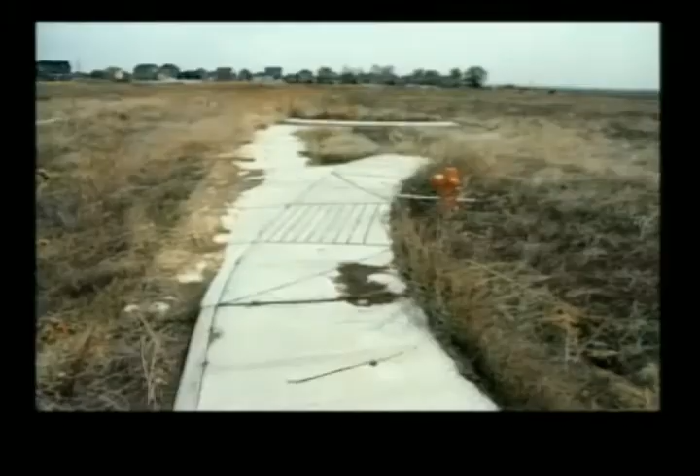This is an example of a community, this one in Colorado, where they've laid all the sewers and pipes, everything's in place, but there will never be one home ever built there. In the small town I recently moved away from, High Springs, Florida, we have 2 such developments, and I can guarantee you there will never be a home. Those years are gone. What we will build will look very different, of course, and the good news is we're returning to the past.

This is a town where I lived for 16 years. This was the conduit to get people who worked downtown in the capital of Tallahassee home to their suburbs. That road will shrink. It will go down to 4 lanes with a boulevard, with bike lanes. That's a guarantee.

One good reason for doing that is we can no longer afford to separate Florida State University from its community. Every year, one student has died there trying to get across this street. And for what purpose? To build in a place that wasn't built at the right scale, the right density, or the right anything, and now we're recognizing that. But think about the cost it's going to take to rebuild a street like this into one of beauty, charm and dignity.

It truly is going to call for new street design guidelines. That's one reason I'm very excited to be working with Ryan Snyder, is that he's pulling together the best experts in the nation to write the new bibles to give authenticity and correctness to what your engineering teams and planning teams are going to need to do.

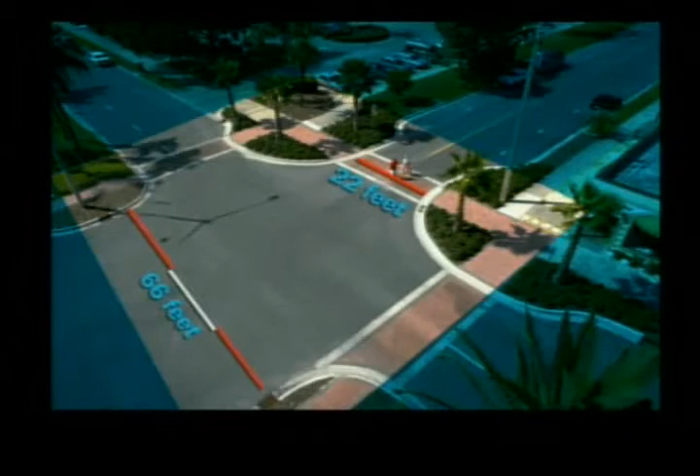There are sidewalks on both sections, but to truly make crossing the street work, adding additional tools, what I call inset parking and curb extensions, is truly the magic that starts to add that aesthetic and quality. That's what you've done. Now, how big is this, and what is the implication for Lancaster to get the downtown and many places healed? This is West Palm Beach.

I helped with a charrette in 1994, and I'm going to show you what this scene looks like four years later. One developer alone brought in $1.3 billion. This has become a hot spot.

Now, when we go back, in that era, virtually everyone had fled the downtown. There were still some people there, but they weren't the people you wanted to bump into, especially at night. In fact, when we were doing the charrette, two of our cars were broken into. When they hired their first transportation planner, brought him down from Canada, Ian Lockwood, Ian had somebody run across the yard where he was staying, chasing somebody else with a gun. That's where it was, and this is where they were three years later.

Once you have the vision, and once people are willing to work together, we end up with a totally different condition.

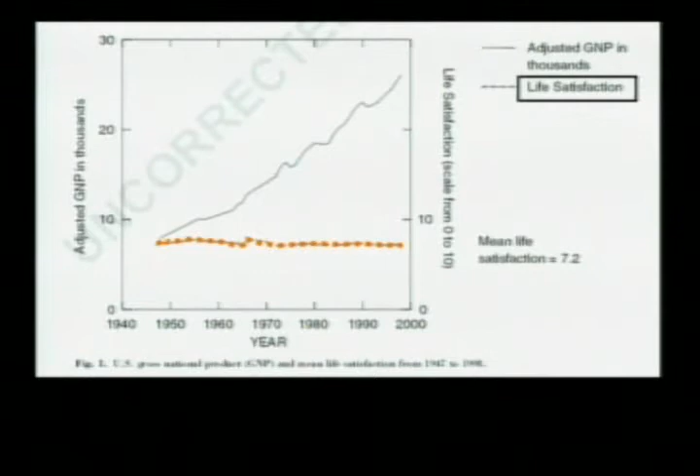There was a blip of happiness. Does everybody see when it occurred? It was in the 60s. Now, I don't know why, but we think it's the Beatles.

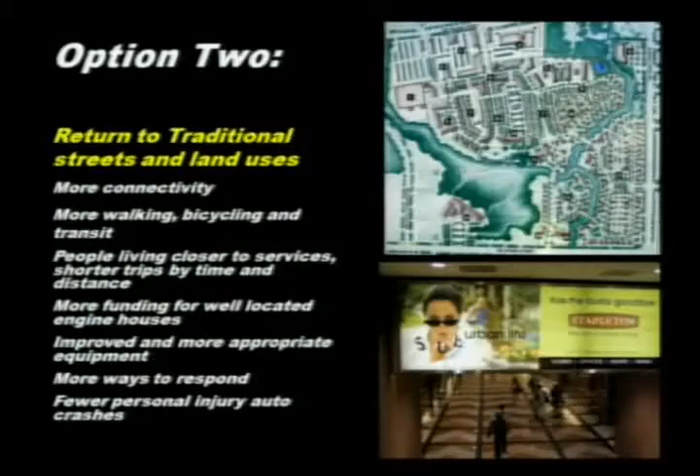Our other choice, and that's what I'm here to talk to you about this morning, is how do we get back to building traditional communities where we don't grow our traffic, we grow our people. I'm going to explain it in pure, raw form at first. Throughout my presentation, I want to make the assumption that all I'm doing is validating—I'm not presenting anything new, but proving to you that this data does exist and that we've got to do these things.

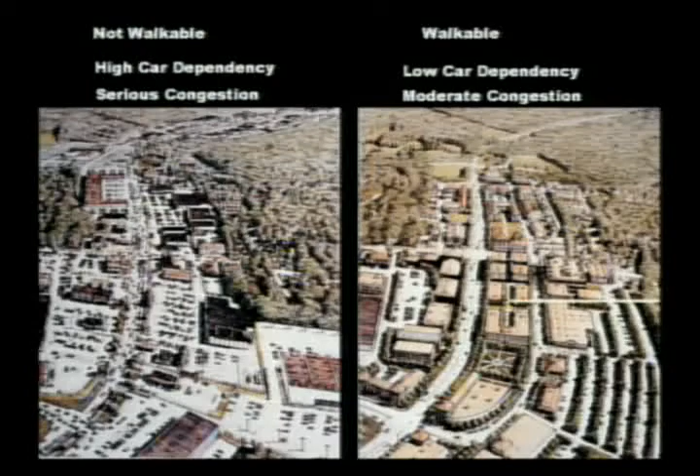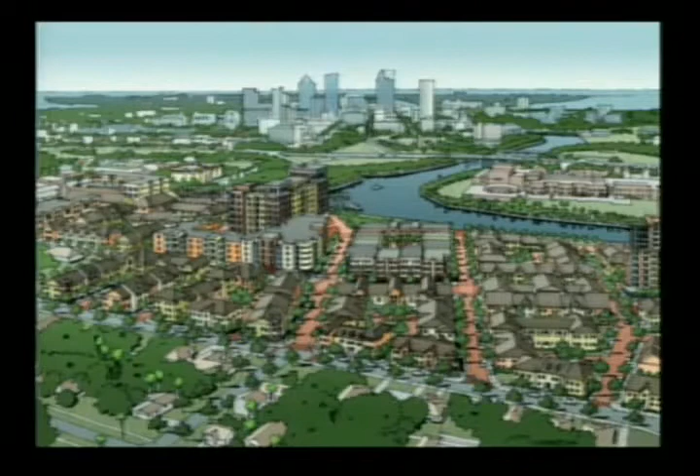So how do we convert this area of Tampa to a walkable place? Look at the open land, what's accessible right next to downtown. It seems like every town has these opportunities. When we laid this out, we said we have to connect everybody to the water, or whatever the open space is—it may not be water, it might be something else in your case, but we have to give them a view. Notice that by preserving the waterfront or open land for the public, with trails there, and connecting the streets back, all these existing homes have a much higher value. Everything you plan, every street you build, had better add value to everyone's property, not just on that street, but on all streets.

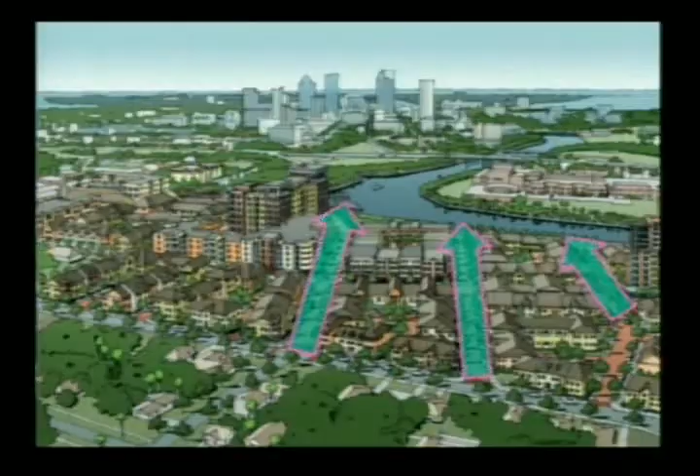90% of the work being done today is not doing this, and that's got to stop. We've got to only build things that pencil out for the greater good of all people. Now, if we want less of this, it's so simple—we build for this instead. By the way, to build for people costs about one-tenth of what it costs to build for the car. You don't have to park a bicycle in a big lot. You don't have to park people's shoes—keep them with them.

So right now, though, we're stuck in a rut. All of the predictive models, the way we measure our success, levels of service, only gives one thing. What I'm saying is we need a new beaker—a measurement that says if we're going to measure our success, we've got to measure how many children we see walking, how long people linger, how many bikes go by, all these things.

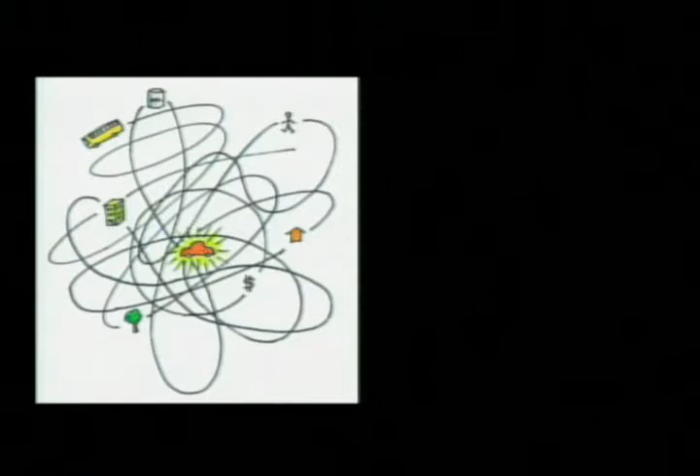But I'm going to pitch out something just as insane as what the Galileos and Copernicuses of their time were saying. Is this true? Am I correct about this? Everything—the economy, our access, our mobility—everything centers around our automobiles? That's what we built. What if it's not true?

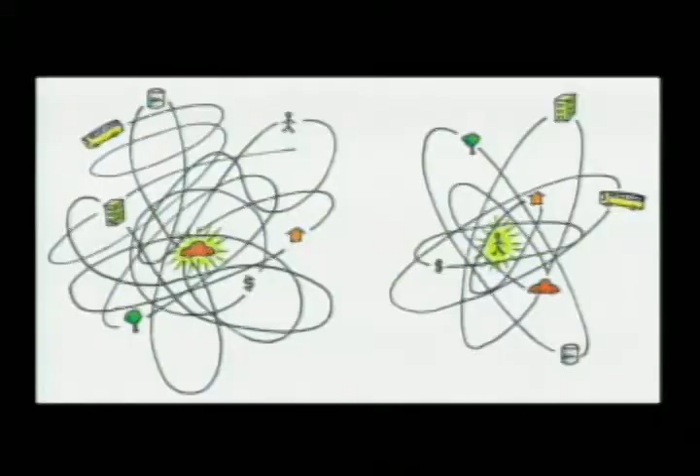Now, I don't want to suggest you go out and say this. I can say it because I'm only going to be in your town for a couple of days, and people say, well, he was loony. But I want to show you what the early years of the modernist era brought to us. It was a dream that one day our cities would look like this. Now we can look at that and say, uh-oh, no, we don't want that. We built that in Las Vegas, by the way. That's really what Las Vegas looks like at Tropicana and a couple places.

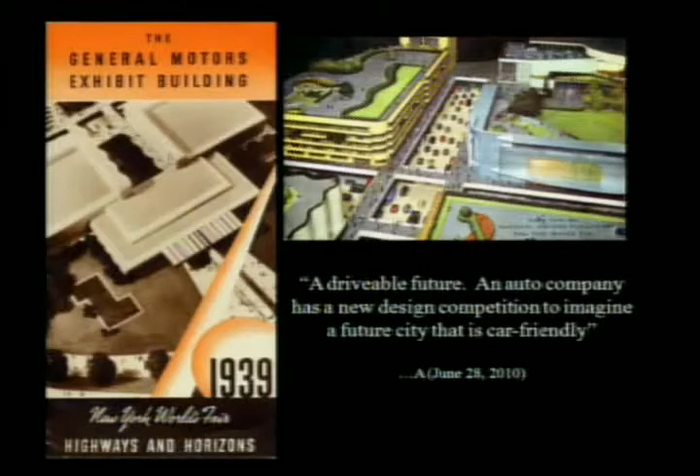I just found this from June 28th, 2010. There are not just some, there are many people that don't yet get it. If we could only add more lanes, do more things. These people don't understand economics. They don't understand the world. They don't understand much. They're just looking for that last silver bullet, put some more roads down so that we can have a car-friendly city.

And it wasn't one organization. This is from the Federal Housing Administration in 1938, telling us that well-connected streets are bad, that disconnected streets are good. The banks understood that. The realtors understood it. Everybody understood it. And returning from World War II, if you were a GI, you could only get a loan to buy a house on a cul-de-sac.

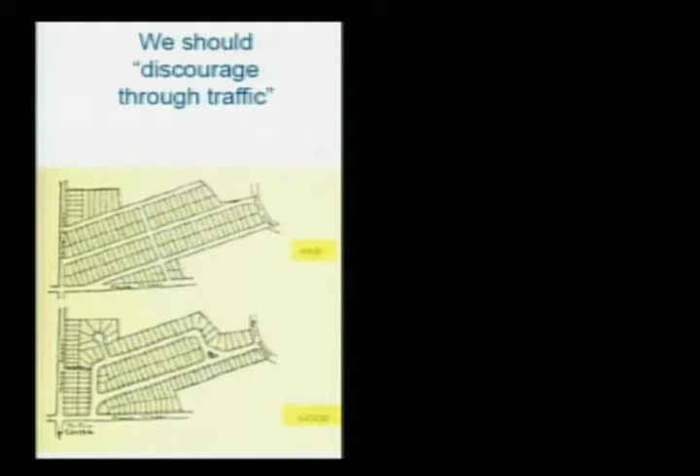So let's start looking at the towns that are shifting. This is definitely a cul-de-sac town. It's University Place, Washington, which, by the way, has no university and has no place. They're one of my best clients. I can say this because they're trying to change. And you can see or feel what that would look like from the ground.

But this is what they're working with. Notice what they're getting ready to do. They're going to put in more streets, more connections. They're going to take the pressure off of Bridgeport Way.

Oh, what did I do wrong? Ryan, can you rescue me? Yeah. I think it's your computer wants an update. Does anybody know the computer here? Oh, we're off of this computer. I'm sorry. Yeah, did you say quit?

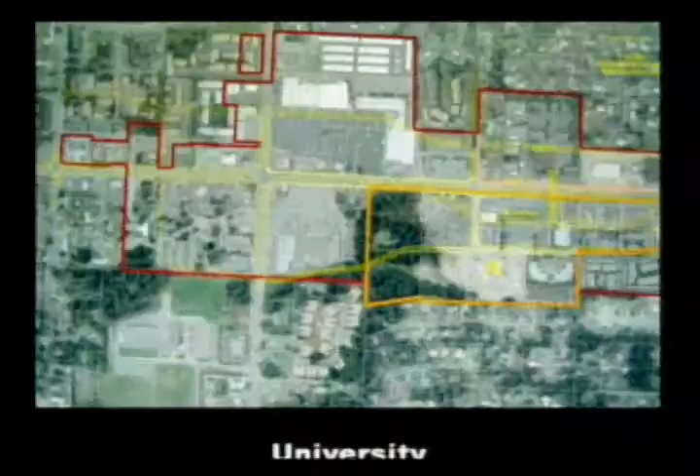So, again, notice this format. We've already built the first of these parallel streets. And here's what will happen: coming off of Bridgeport, we'll add a nice little connector, and they'll build their brand new downtown in a former strip center. The city bought the land. No developer can do that, but they could, and they did.

And this is what the principal road looks like. This is Bridgeport Way. When I came and did my presentation in 1999, I went up in a bucket truck, and this is what it looked like. One year later, it looked like this. Now this road has to move 23,000 cars. We don't have a choice, and it does it very well. Now you can see what it looks like 9 years later. Go back to the air in 1999, and now you can see from the ground 9 years after that.

And so they set the stage. The road had to be changed. You can't ask somebody that's going to bring you $1 billion to seat it in a seedy place.

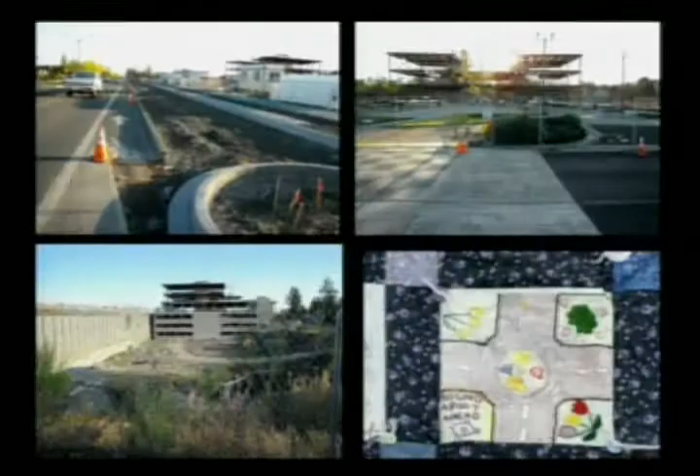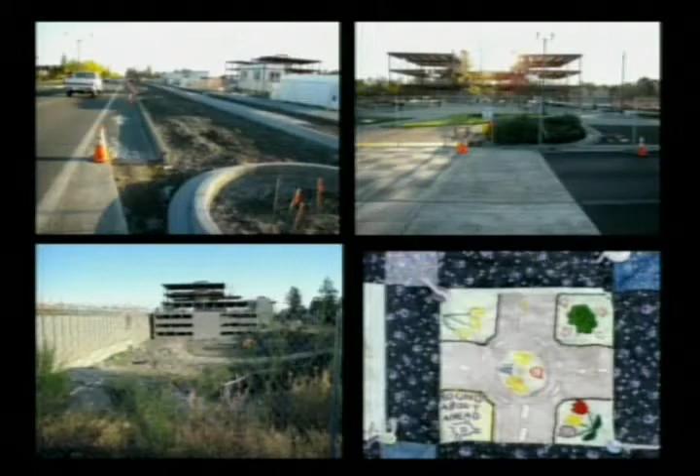So this is the interesting part. 11 years have gone by now. They're building their new city hall, their new library, their new cultural center, their new plaza, and guess what they're doing? They're tearing apart Bridgeport Way again to put in back-in angled parking. This is a regional trunk road. They're going to want many people to come here, and now they're putting in raised intersections to slow the motorists down, and they're doing it in a way that's proving to be very effective.

It still moves the traffic. Big equipment doesn't have a problem getting over this because they put a lot of thought into how to design it. But their goal was to get people down to a speed where they'd let the pedestrians cross and things like that. So times are changing.

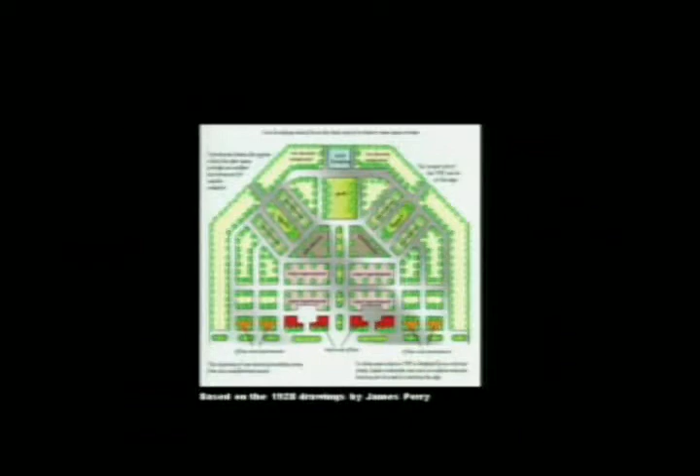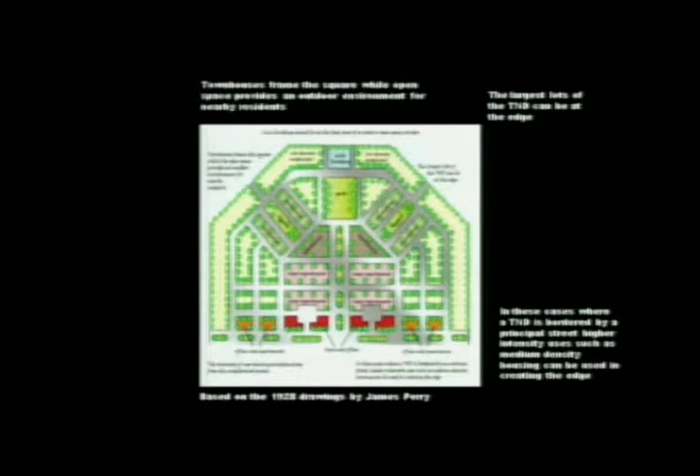I want to share with you that this is not original. In 1928, before the modernists took over, this was what James Perry, one of the brightest of all, was saying we could do to accommodate the car and people at the same time. This is the model.

Except for a couple of little places, it never got built until Seaside. And look at it - it's exactly as though Andres Duany, Elizabeth Plater-Zyberk, and the whole team just took a piece of paper and sketched over Perry's design and laid it out, because it was perfect.

Now, people will pay over $1 million for one lot. They went on the market at $7,500. I got to work on the project, and the developer offered me 2 lots for $7,500. I didn't have the money.

Now, here's the rule, and it doesn't matter what you're orienting to, as long as it's to the right thing - in this case, to the water. This is a town, Fort Pierce, Florida, circa a long time ago.

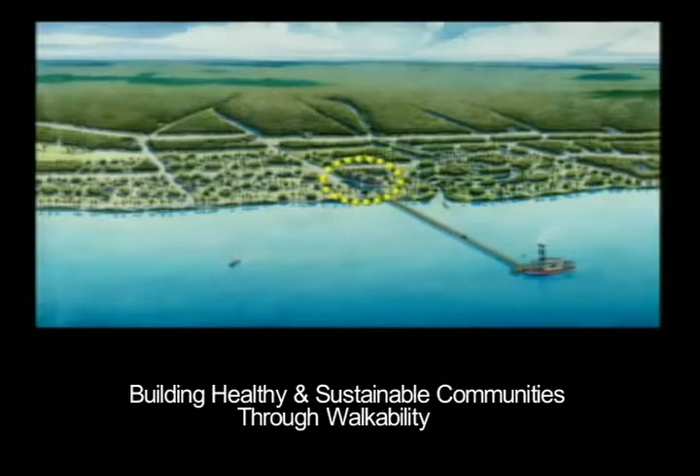Now you'll see what it became in order to meet the needs of the auto. And there's no beauty, there's no form, there's no performance there. We did the charrette, and 90% of what you see here is now built.

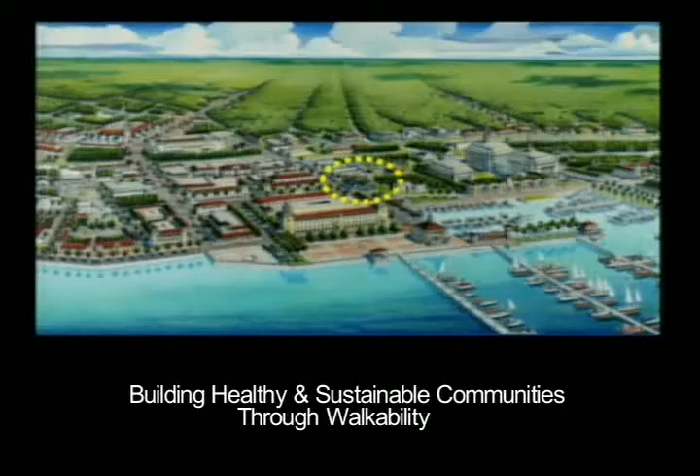And that's what we're talking about. As long as you get the original street patterns in, you can come back and rescue any place. So the more of Lancaster that got laid out correctly before the forms went bizarre, the better off you are. Now, you won't be able to do it everywhere, but you have so many places where you can do it that we can make this the phenomenal success.

Quiz time. Which United States president laid out Alexandria, Virginia? George Washington. How many of you thought someone else? George Washington attended how many years of school? He never went to school.

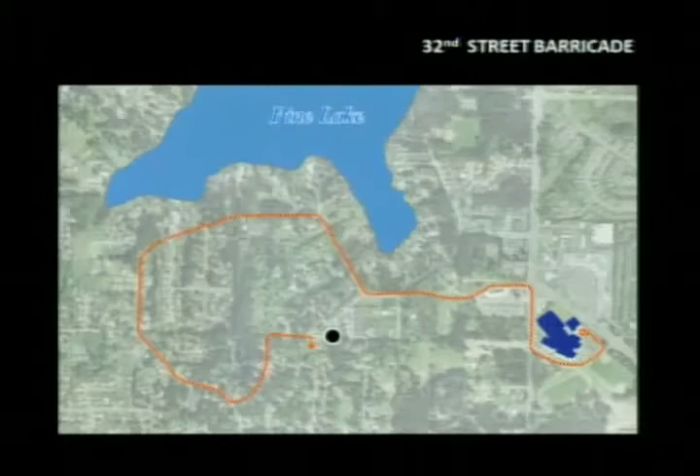The roads on the right are having to do all of the lifting. So, imaginary trip: you live where the red dot is on the left, and you want to get to the place on the right, which is a high school. You could walk there if you just could, right? But now you have to get in and tie up traffic for over 20 minutes, one way. This is what we can't afford. Connectivity is the key.

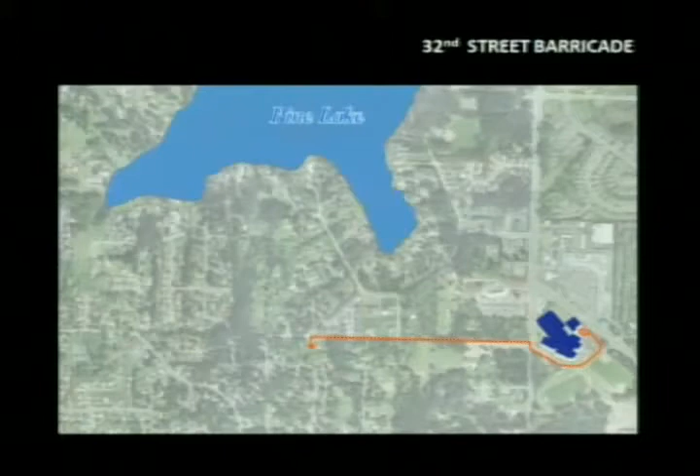All we have to do is put in a trail. It could be a street, it could be anything. And now people can walk, they can bike, or they can drive a much shorter distance. See how important this is?

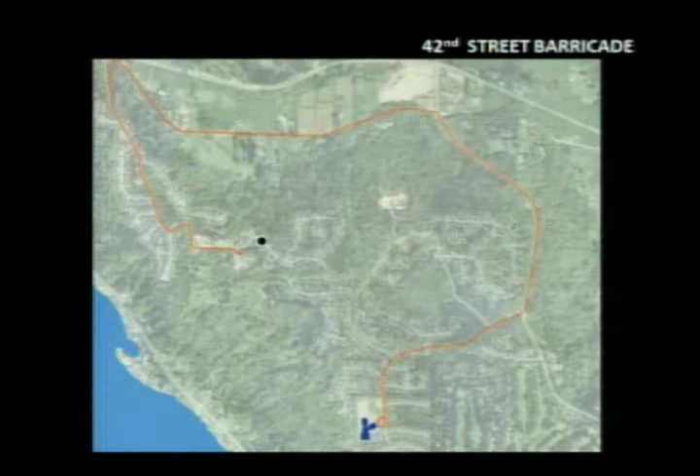Here's another trip. From, let's say, the upper left, this is a 40-minute trip in the wrong direction. This would greatly simplify it, and in this case, all we have to do is take down a barrier. That's all we have to do.

But the day we were there to do that, people on one side of the barrier said, if you take down this barrier—and she had a child, a young child in her arms—she says, you are responsible for the life of my child. On the other side of the barrier, another mother says, if you don't take down the barrier, you are responsible for the life of my child. Either way, I lose.

It's sad that we've gotten ourselves into this conundrum where we're arguing over the wrong things. And so as a policy, the people of the community want to take down the barriers, but not in front of their house. And that's where we are.

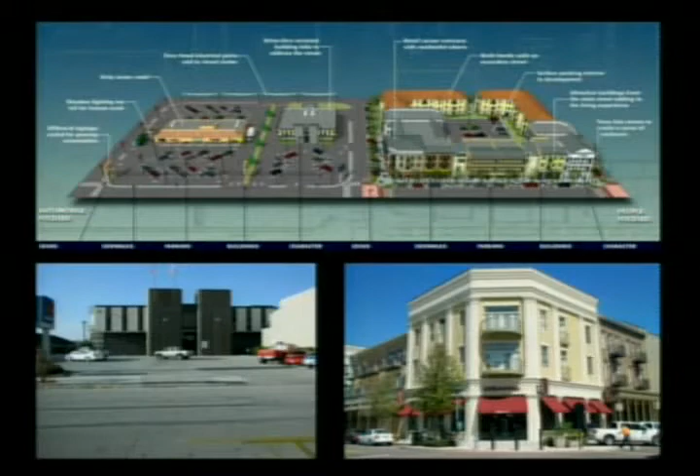These posters, by the way, ultimately we hope to have 30 of them. We have 2 so far. We want every person, not just people who know how to read code, but every person to understand why they might prefer one design over the other, why they might want the right side placement of the buildings versus the left side placement of buildings and parking and everything.

And this is our second poster. It hasn't been officially released yet, on how to lay out a school that many kids can walk to, bike to, share the park, share the resources all the way around, get some mixed use in, get all these things.

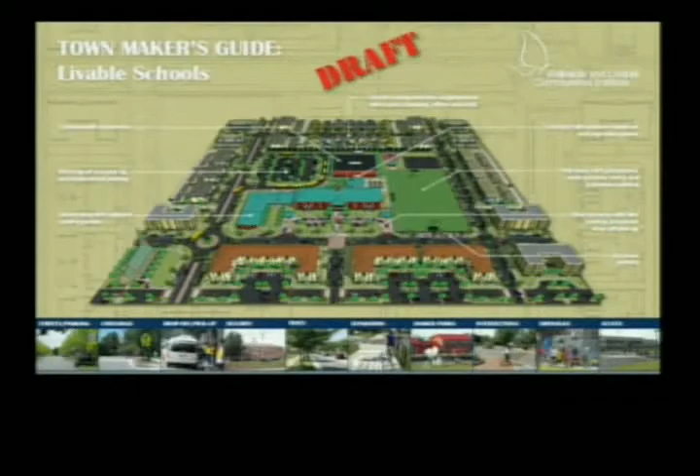So again, we want to simplify everything so everybody can grasp it. And now let's get down to some more details.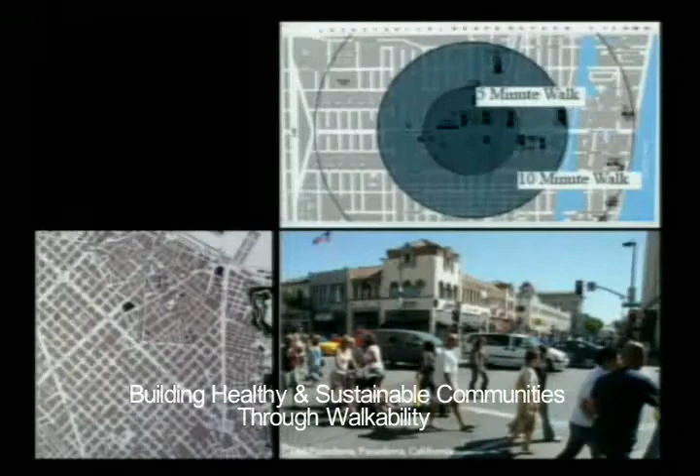The key for everyone, and I'm going to suggest that all of you go and either get an app for your phones or for your computers, walk score. Does anybody know the walk score for right where we're sitting right here? It's 80. I checked it. That's not bad. In fact, that's pretty good. But for Lancaster as a whole—

55. A very important point. Now, that's out of 100. For every single point you can go up in that point scale of 100, you're adding anywhere from $800 to $3,000 to the property value. It's all about what's near you, how well you can get there, how well connected it is.

The 5-minute walk is ideal. 10-minute walk is fine. Even a 20-minute walk will work. By the way, we have studies going clear back to the year 1014. I don't even know what life was like there, but the studies show that people will walk up to 20 minutes to their fields, their streams, whatever they're going to do. So 20 minutes is the magic number. And it doesn't matter whether we will drive or we'll walk or we'll bike, 20 minutes, you can stay within 20 minutes. People have an inclination to do that first.

The popsicle test. How many of you live somewhere where you could walk on a hot August afternoon and get some popsicles and bring them back to your child without melting? How many of you live that close? One? Okay. In Port Townsend, where I moved to, I can pass that test in 3 different directions. And that was part of my criteria for my house, was I want to be able to get a popsicle in at least 3 directions. The other way, I just get wet, so it wouldn't work.

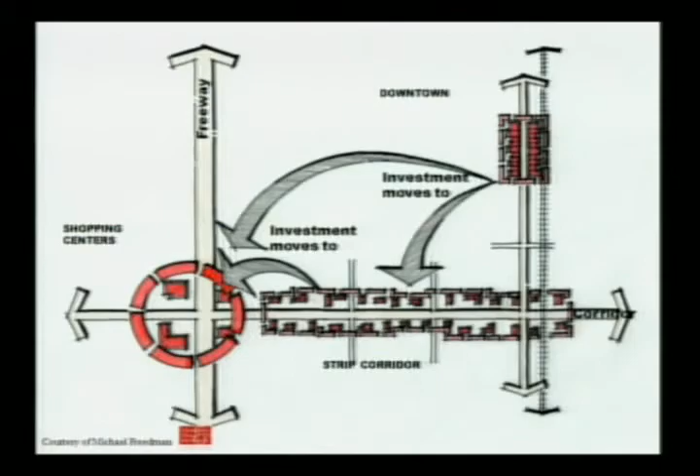We built the strips, we sucked the life out of the downtown, so investment moves away. We did it by code, we did it by many things, all our incentives, and this is what Michael says.

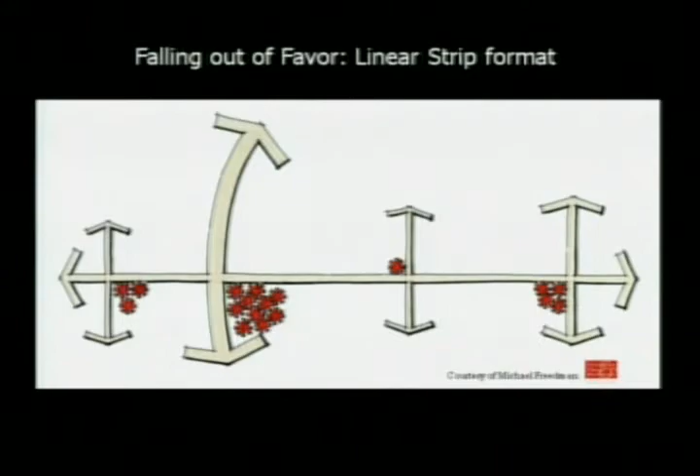The future will be, and I'm absolutely convinced this is what your community is already setting up to do and must do: compress the trips to a couple locations. Many people will live there, others will walk there, others will bike there, others will drive there. You'll do it with centers, and the centers will have different sizes or scales.

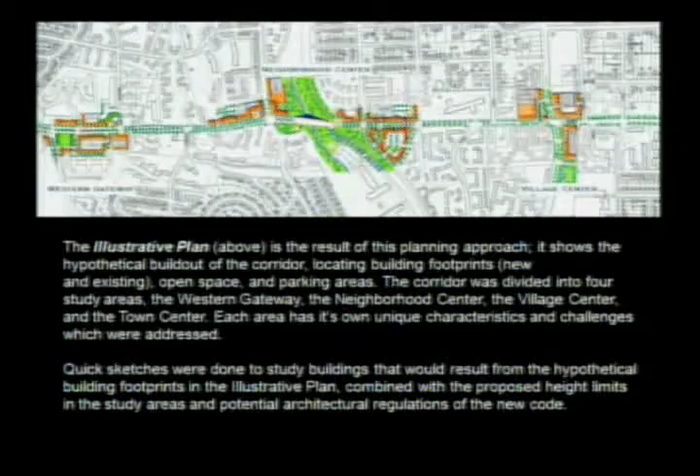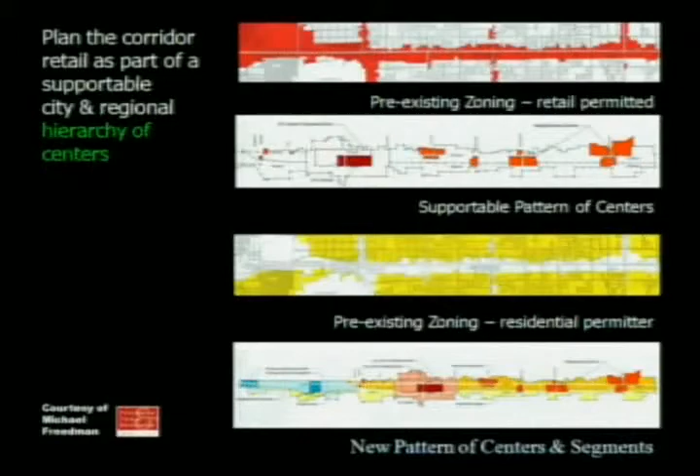The places in between, you might even change out the code or application, obviously. And you'll change the way you draw your maps and what the maps mean to the new pattern, where you create the truly active centers and segments.

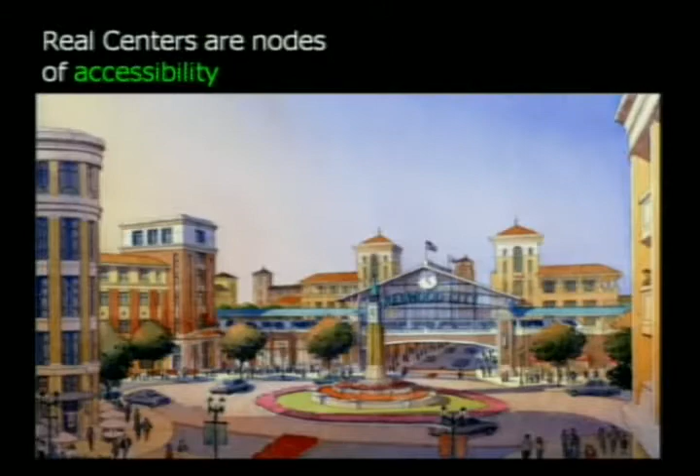This is just one of probably the first 20 eco-villages, they call them, in the greater Vancouver area. This is where many people will choose to live, and they're doing it with incredible design, places of the heart, places for people. Here's the good news.

The more people live in these places, the more the home values go up in the cul-de-sac communities, which are right behind these. They're now within walking distance of great buildings.

They now have high intensity delivery of transit right into Vancouver. They don't need to drive into Vancouver anymore. If they want to drive in, there will be less people doing it.

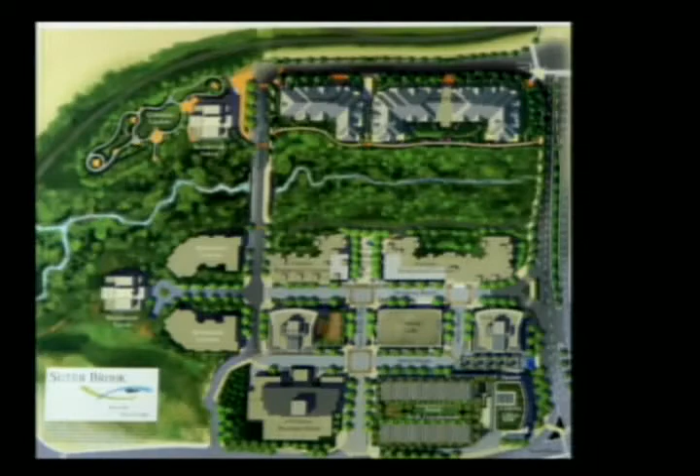And now they can preserve and protect their great watershed. And again, it's very thoughtful how they put everything together.

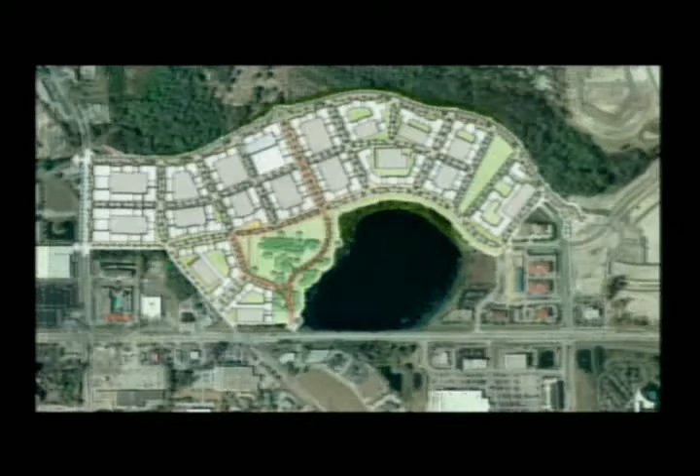In Orlando, I think you can see them. There's one, two, three very significant intersections, all of which during peak hour will tie up. So if you want to go here, you have to go through three intersections, and it'll take you 20 minutes in the wrong time. 20 minutes.

You don't want to be a fire responder trying to get through that traffic. So what if we put in this development? And what if we require the developer to put in the right street connectivity?

It's not an option. You want to build? We'd love to have it, but you must put in that street, you must put in this street, we have to have these connections. And now you're the driver and you take either the green route or the blue route. You don't need to tie up anybody's intersections. See what I'm talking about?

We cannot go forward in our country with our economy, which is correcting itself, I think, in the right way, and not be a consumer society. We need to have land use and transportation talk together, 100%.

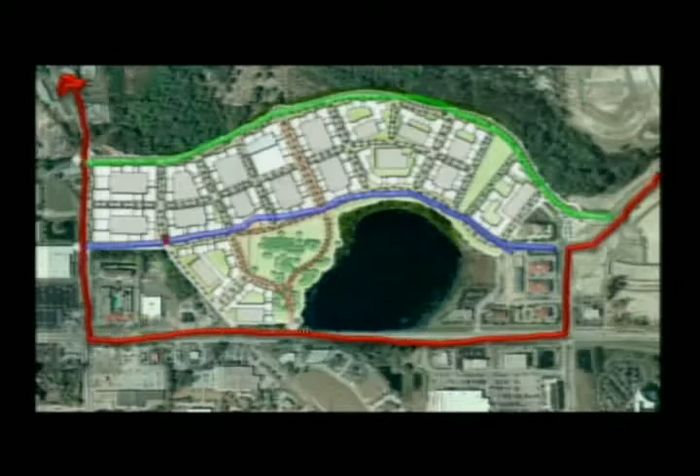So if there are two takeaways, that's number two: don't build anything with transportation that's not going to build community, and don't build any community that's not going to solve transportation dilemmas. And then, of course, many people can live there, work there, shop there, be entertained there.

Let me skip this one for now. I'll skip this one too. I want to get on to a few other things. I want to take a break too.

But are you going toward a form-based code? Is that part of what you're moving toward?

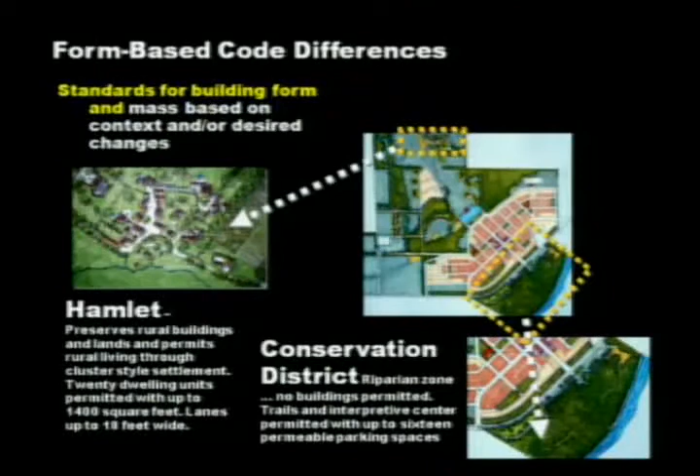Okay, well, this is just an example of a town that developed three different codes for three different areas: a downtown area, a conservation district area, a hamlet. Each code reads very differently, but all allow the developer predictability. If you're going to invest here, you'll get 100% approval real fast if you follow this form. Don't try to fight it because it'll take you forever.

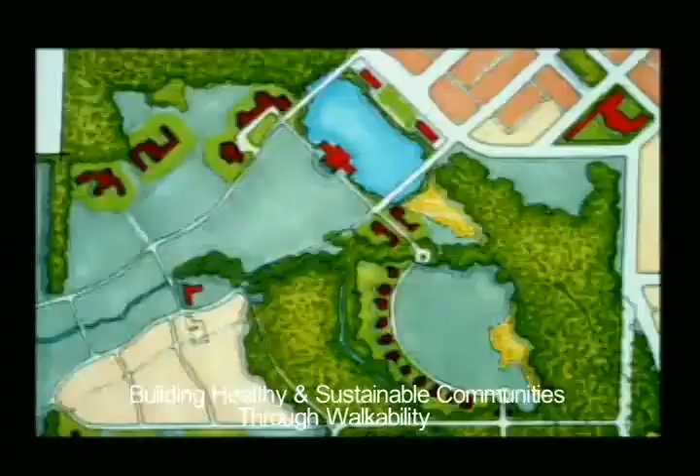But now let's talk about security. What's missing here if you want people to walk?

Sidewalks? Crossings? Something else missing? What is it? Trees. Something else very important that's missing. What is it?

You have to have the buildings. People have to watch over. So when we take our walks tomorrow, I'm going to be looking as much for would I want to walk here as how easy is it for me to come up and down your sidewalks or crossings.

You have to have the buildings. If your code doesn't say the buildings have to watch over the park, watch over the schoolyard, watch over whatever, the code's wrong. We cannot have the backs of buildings face our most important places for people to walk.

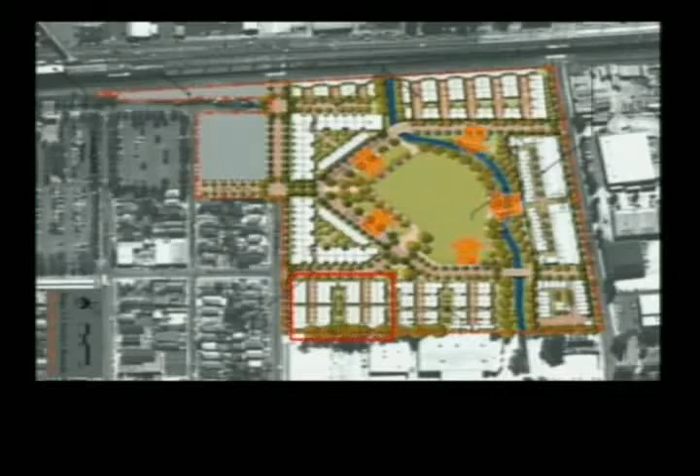So this one's done pretty well. It's not perfect, but I think you can see how the eyes all watch over where we want all the people who live here to congregate and to enjoy.

And we can do it. We have many, many beautiful building forms, and we can do it any size, any scale, pocket parks on up to the grand parks. By the way, wonderful story.

These are affordable housing. People get support to move into this housing, but they buy the houses. These are 10 years old. They're in Petaluma, and the kids play right there. No one tells them when to get off the bench. No one even tells them what the rules of baseball are. If the rules work, they play them, and if they don't work, they change the rules.

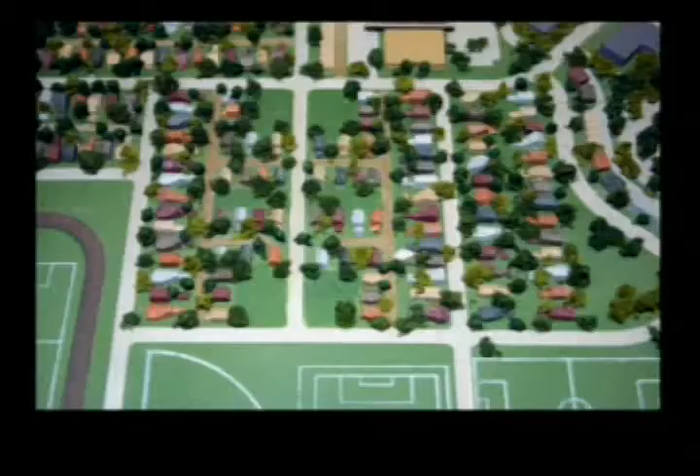These are all examples of what many cities are learning to do to craft and create really cool places. Now we'll go to the air to look at Stapleton, but look how thoughtful they are in creating all these courts. The courts are the center of the life of each cluster of homes. This is what they might look like.

In this case, it's a different town, Prospect, beautifully laid out, just elegant in its form. This park became this after, I think, 9 years. Isn't that amazing?

The fire service needs 20 feet for all their operations, to pass 2 fire trucks, all kinds of things. I don't have any argument with that. My dad was the fire chief, my brother is a lieutenant in the fire service. This is the street they would favor, 20 feet. But notice what we did, the inset parking. Very thoughtful, and really adding value to the homes, and very nicely laid out.

These are the things we need to think about. The park right there - get as many parks in as you can. Every park adds value to every home nearby. The general rule of thumb would be a park within an eighth of a mile of every home.

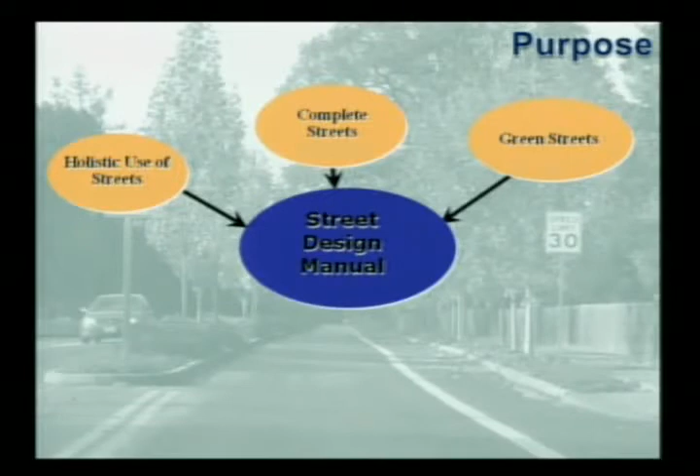There was never a chapter in their Bibles that said how to lay out a main street. That chapter never got written. Now it will be written. And good news, that one Bible could add value to every community in America once they start to get followed.

Brian, did you ever stop to think about this? You probably, because you've applied for the grant and got it, you're going to be responsible for over $500 million of new, properly designed infrastructure. Did you think about that?

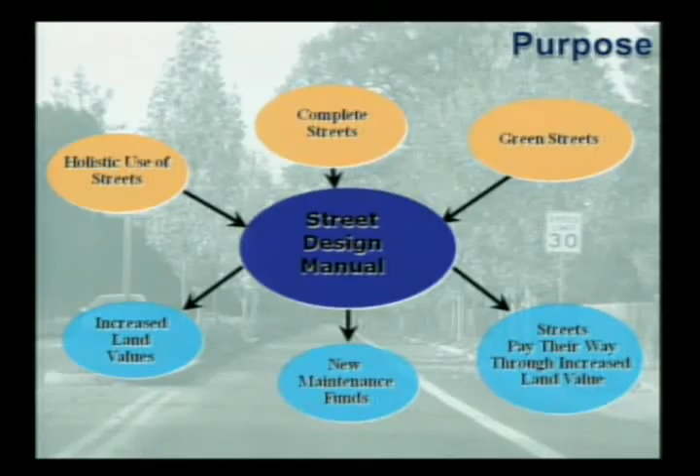Now, the rules to do what you need to do are actually pretty broad. One day I was up in a bucket truck. My client was Claremont. I took that picture, but then I said, let me turn around. So I just turned around the bucket truck and shot Pomona. Anybody see a difference? This is the same road, Route 66, Foothill Boulevard.

The same funding source, Caltrans, the same drivers, and 2 completely different designs. That flexibility is already in the Bible. But we're not going to toss out the old book. We're just going to enhance it, make it easier to build what's going to make more money. How would that happen? First, add paint.

You've got a lot of roads, I've driven some of them. You got a lot of roads. Just add the paint, it's cheap. It does what you want it to do. But a little bit later, as your infill comes in, now do the inset parking, add some more details.

You need gateways. By the way, we talked about Seaside earlier. This is the new community that spawned off of Seaside. It's called, I think, Watercolors, something like that. Anyway, we're coming off of a 55-mile-an-hour state road and coming into the community, and here's what they do.

You slow down the traffic before it gets to the community. You put in the median, you put in a pre-median, you put in grasscrete for the shoulders. There's no shoulder here that you can see, but it's there. This is done very thoughtfully. So everybody who was doing 55, by the time they get past this median, is going to be doing about 25. Then when you get to the buildings, it's right.

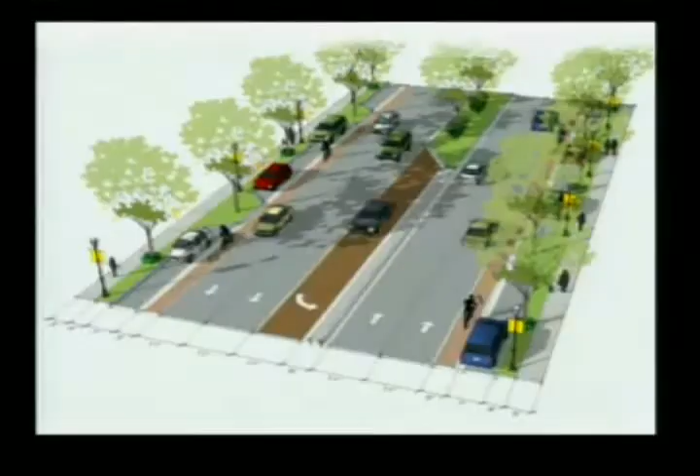Tree wells. You're already doing many of these things. Tree wells, though, are an incredible enhancement to a street, side streets included. Nice edging, nice detailing. You don't need bike lanes on all streets, by the way. When the speeds get up higher, say above 25, bike lanes become very, very important.

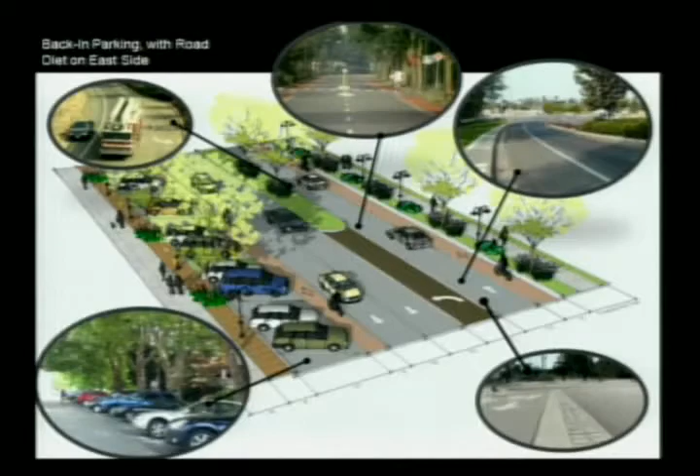You can actually put bike lanes into back-in angle parking. You can't put it next to front-in parking. And so these are all options we're giving to our client, Encinitas and the community down that way. And look at all the nice little details. For the bike lane, for example, in the right location, putting in 2 rows of cobble is really a nice detail. We're working on that with a second client on how to do that.

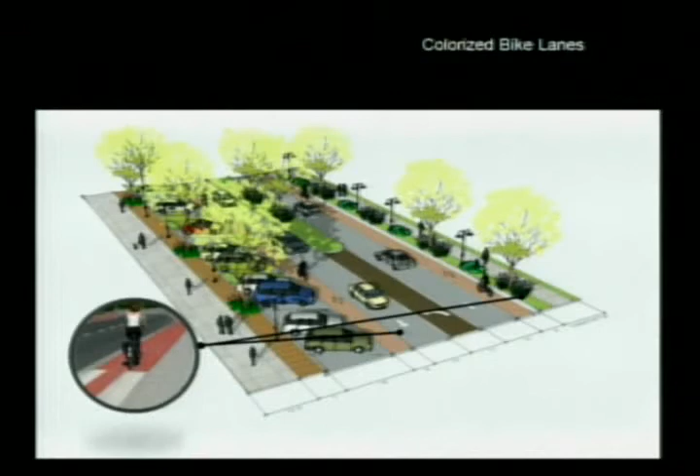Notice here we're taking out lanes, just as you did. We're colorizing the bike lanes. The bike lanes do make a difference here. This is a very, very heavy bike flow. Solana Beach, those of you familiar with Solana Beach?

But this is the one I really wanted to get to show you. This is in Long Beach. It's called the Green Sharrow Lane. It's brand new. Only 2 cities so far have it. And it's just amazing. See if we can, obviously the crossings.

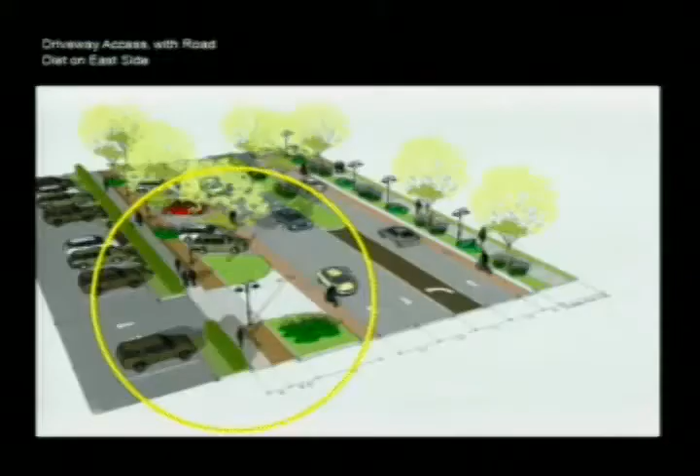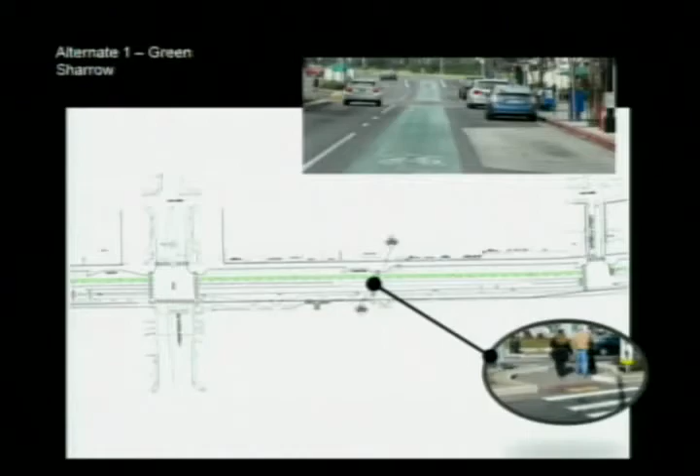Driveways. Now notice how much easier it is to get out of this driveway with the curb extensions. How hard that would be if they weren't doing the curb extensions. Here you go. Now, the Green Sharrow, like this. And there's Ryan on the left, I think, isn't it? And now the motors, by the way, this road carries 38,000 cars.

It's a big number, and everybody quickly gets that. I don't think they have any special signs up at all that if there's a bicycle in the Green Sharrow lane, they own that lane. That's it, period. Don't even think about tooting your horn. And anyone who wants to park enters that lane. Anyone who wants to unpark has a way to move. And it's absolutely profound.

That's Long Beach, a little community there called Belmont Shore. And now we're getting people riding bikes we never would have seen before. Never. And they're not on the sidewalk. They're riding where they feel comfortable, including younger folks. And they're out of the door swing.

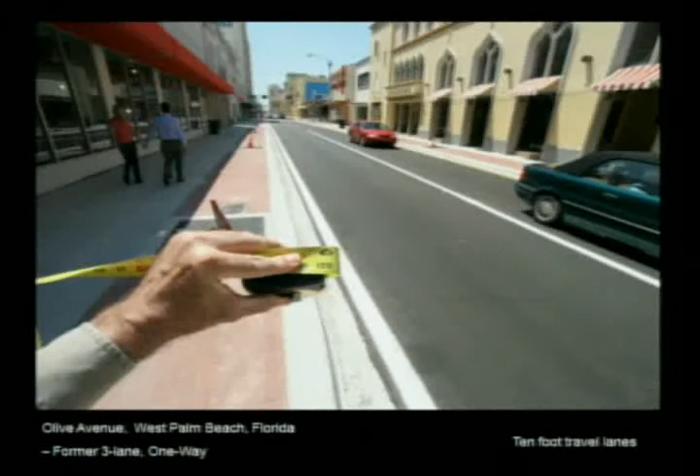So that's what we're talking about. Now let's talk a little bit about the speed reductions. How do we do that? West Palm Beach, remember the story of West Palm Beach. There used to be 3 lanes here. Each lane was 12 feet wide. That is a big street, one way. And we decided not to tackle the one-way issue, but to take out the extra lane we didn't need.

And one may say, well, what about the traffic? In West Palm Beach, part of the chemistry was we took out 16 lanes, in order to make it a civil place for people, again, to get the speeds down, to get the people to come back, to want to live there. Traffic today is working better.

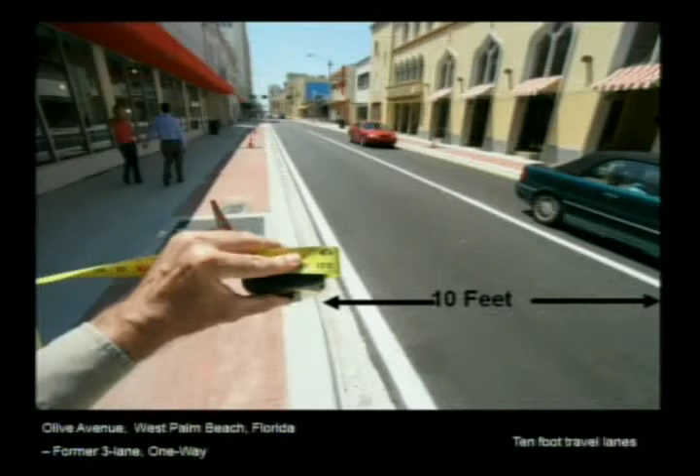When you build too many lanes, you can store a lot of cars, but now have more time waiting at the intersections. So look in the other direction. This used to be 36 feet. We have to set the clearance interval to get the pedestrian out of the street based on how wide the street is. You get it down to 20 feet, you can award more green time to the other lane of traffic. So there's a lot that we don't know that we're learning, but we're learning it very fast.

Probably one of the most profound tools that you and other cities will learn to do is to take out signals, put in roundabouts. Roundabouts move 30% more traffic per lane.

Roundabouts eliminate 90% of personal injury crashes. And that's just the first two benefits. They also become very authentic, attractive gateways.

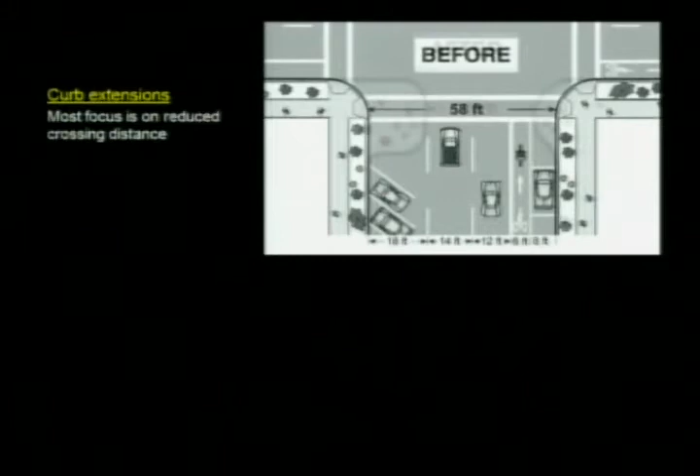Here's one of the great benefits of curb extensions: it allows the big vehicles to make their turns. Somebody could park too close to the corner and eliminate the turning. You put the curb extensions in, you deal with the sweep of the vehicle, and now you're helping the fire service, the sanitation worker, or the Coca-Cola bottle deliverer get to their mission. We don't want to hold up Coca-Cola.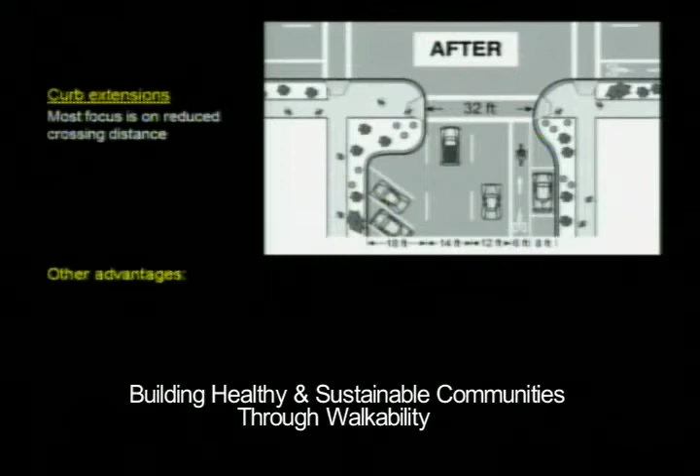It opens up sight lines. You can now see the pedestrian, and the pedestrian can see the motorist. And they're beautiful. They absolutely are stunning and help bring back property values.

Now let's get to the big guys, the intersections themselves, standard intersections. To me, this is beautifully orchestrated. This one in Mountain View uses post-mounted signals, getting the motorist to look at the road, at the pedestrian, at the traffic, versus the much higher strain poles, which fortunately I don't think California ever went that bizarre. These are beautifully done. Notice you can see from all angles of approach.

We can also do countdown signals. This one I showed in Abu Dhabi, where they're doing many new treatments. Not only countdown for how much time you have to get across the street, but also how long you're going to have to wait. They're truly ahead of us on some of these technologies. So you got 40 seconds, 25 seconds in this case, to wait.

Raised channelized islands get the streets down to the right size. They're already putting in raised channelized islands to slow the motorists down when they're going to be in conflict with the pedestrian. Very wise. Raised intersections really heighten the quality and aesthetics of a street. This in Baldwin Park again, Orlando.

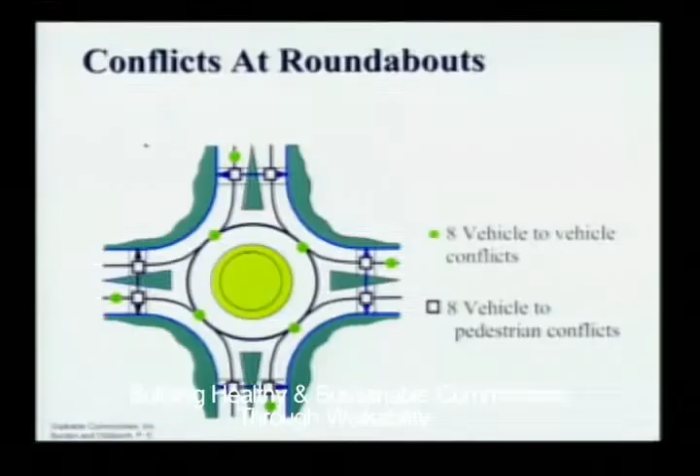I think I already covered roundabouts, but let me tell you the history of the first roundabout in Florida in modern times. This is it. We had to move 18 to 20,000 cars. This is a principal road in Florida. Here you see it from the air. That's a very tight location.

So I went to the fire service. I said, we're losing one pedestrian every year here. Would you be willing to work with us and let us build a roundabout that won't let your truck go left? We can still do right turns, we can still go through. He said, yeah, we can come in a block earlier, we can go in a block later. Doesn't matter, we have a grid.

So this is where we fit it. This is what it was like before - again, we're losing one pedestrian every year. And this is like 15 years later. You can see the land values went up significantly. This was the kickstart of the brand new downtown. It took this to tip that point. And so the price of one roundabout truly launched an entire area.

And 15 years have gone by, no recorded crash yet - not just fatalities, no recorded crash.

And it's moving now 23,000 cars. This one, moving 21,000, but on peaks they'll get up to 23.

Here's the myth: roundabouts cannot be used when there's an imbalance loading. You have some side street traffic, you only get 2,000 cars a day, and the Principal Road gets 23,000 - the cars on the side street won't get in.

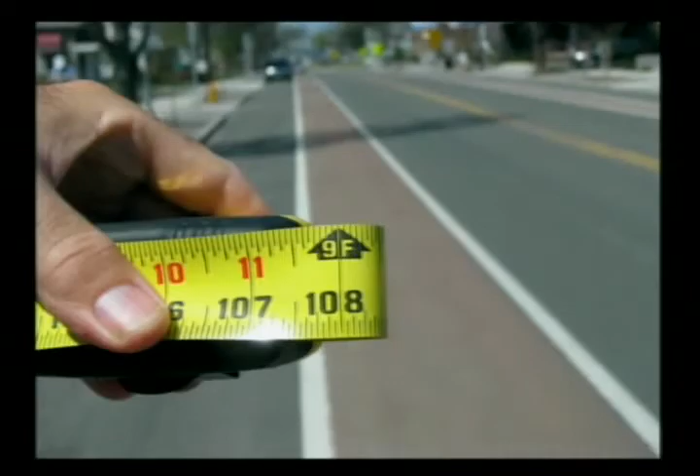And the point is, we have to use our brains and come up with some new combinations if we're going to come up with winning streets. This town works so hard, so well together. This is what anyone would fear.

You got a truck making a delivery, another truck can't get by? Yes, it can. It may only go by at 10 miles an hour, but it will get by, and it won't even have to go in the other lane.

This is a major truck route, and here's the point: the truck drivers just want to stay in motion. They don't want to grind down and wait at a signal and grind and grind until they can finally get underway. They want to stay in motion. If we come up with a design that works for everybody, everyone is served.

Now, here's the cool thing. This may win the top new street in America award by the American Association of State Highway Transportation Officials. It's already in the top final 10. We don't know when they're going to announce the final.

But the other thing, and this is what the community cares about, they learn to work together in order to get this to the level that they now invent new things to work on together. They've come up with all kinds of street festivals and other events. They went from rated number 12 out of all the 12 villages, to now number 2. Hamburg, New York, near Buffalo.

Probably under 20 feet of snow right now, and still kids can get to school.

Here's how the pedestrian crosses. They come, they look the correct direction. You can see a car could stop there if it needed to, but it doesn't in this case. As she approaches the center, the third motorist back realizes he's not going anywhere. She looks the correct direction, gets out of the street, and not one car has been delayed.

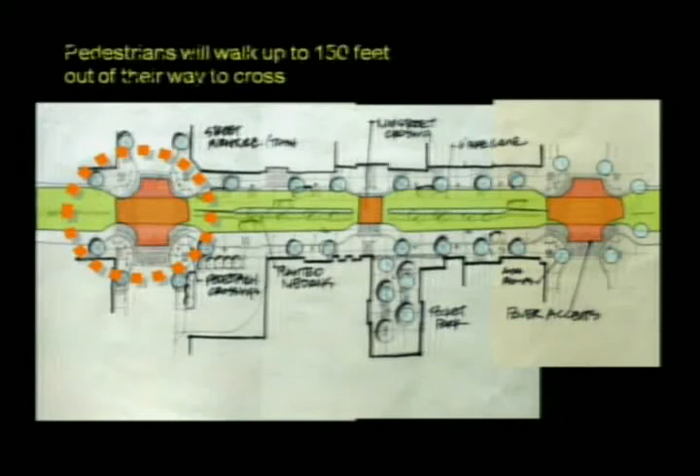Colorize the center turn lanes, another feature, and crossings. Really, where you expect a pedestrian-rich environment, try to get a crossing in every 300 feet.

That means the most a pedestrian would have to go out of the way would be 150 feet. High emphasis marking is so inexpensive, yet it provides so much benefit.

You can see why a motorist who only sees parallel lines, even good parallel lines, gets only a tiny bit of visual information. But with the bars, they see huge amounts of information.

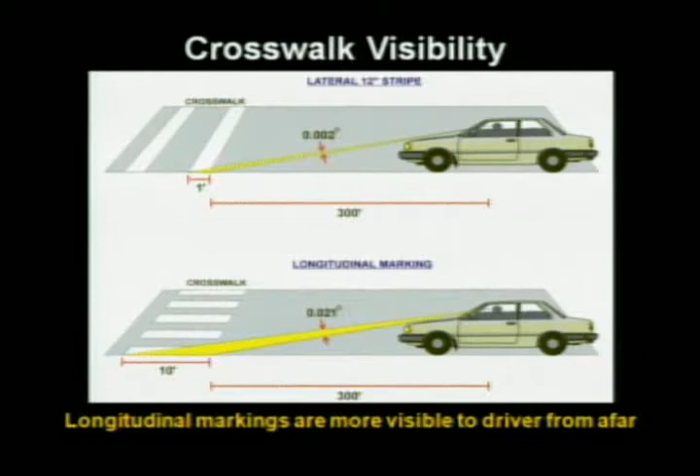So think about how you're going to use combined tools: curb extensions, crossings. In snow country, they'll grind down a little bit and inset them, and they'll last over ten years.

Madison, Wisconsin. Solano... Fairview, thank you.

I'll remember it later. So, anyway, think about where you put the marks.

You don't want motorists driving over them, you want to drive them around them. Again, there are so many tools we now know. By the way, for the blind, having the ladder style is all the better, because they need an edge that their foot can feel.

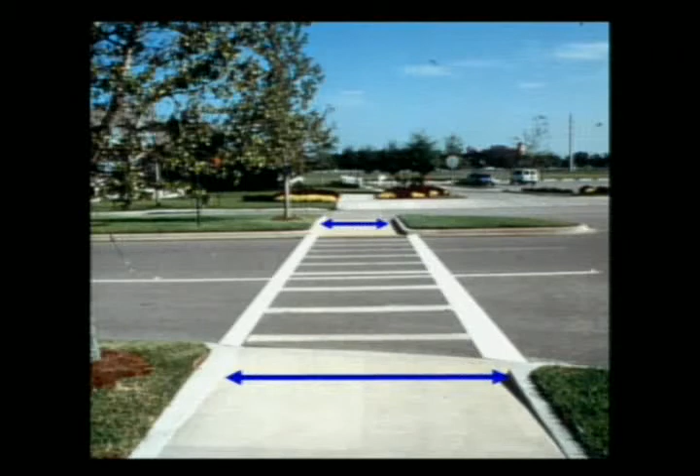Port Townsend, Washington, was the result of a conference I gave. A citizen went back, ran for the city council, worked with the engineering community, and got this street totally redesigned. It's a beautiful street, a diet plus a crossing here in front of a school.

Kids can now get to school. Notice we put in a 45-degree angle to slow down the pedestrian from running and also force them to look straight at the car.

Golden, Colorado. A visual trick here: the actual opening is 13 feet, but the motorist only gets to see 8 feet. Is that cool? Use our brains and not massive amounts of money.

Back-in angle parking, and I'll end here. Do you have back-in angle yet?

Where you put it in, how you put it in matters, but it's not a new trick. It's been done forever. Any vehicle type can do it. Cowboys can do it.

Classic car owners do it all the time. It's a greater benefit for anyone who wants to use their trunk, get in or out of their car more safely, and do deliveries or actual work.

I just can't imagine why front-in parking has hung on as long as it has when back-in has been there all along. Seattle now has 200, 400 blocks worth. It's just the safer way to park.